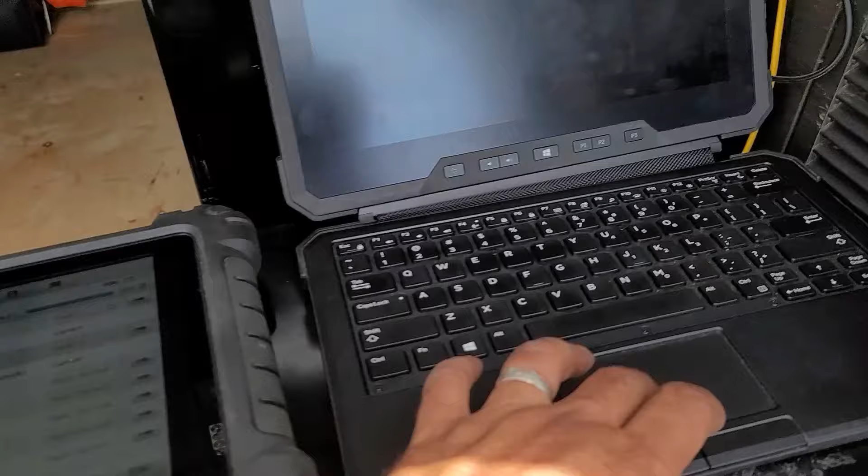I'm working on a 2015 Nissan Altima 4-cylinder, customer complaint check engine light. I scanned the vehicle, and in the engine control module we have one code, which is P0101 mass airflow sensor circuit bank 1. Usually I don't look at the computer mass airflow. I went to the engine control module and I looked at it. It's an easy design, 4 wires.

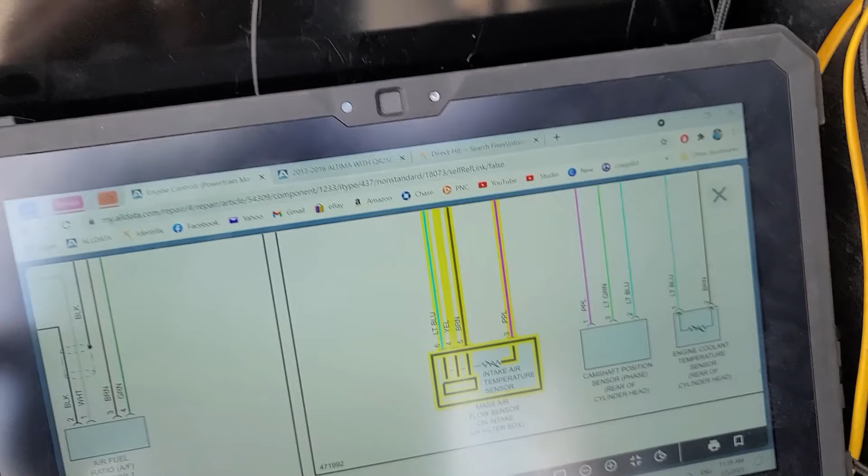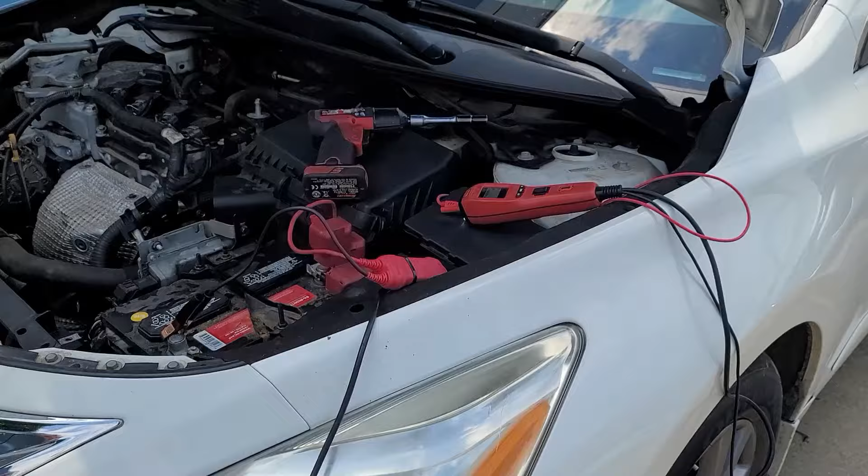This component has 2 sensors inside, the intake air temperature sensor and the mass airflow sensor. There's 4 wires, power, ground, and 2 signals sent back to the computer. This yellow one is for the mass airflow sensor, and this purple one is for the intake air temperature sensor. If you guys are at home and need to do this, it's easy.

All you need is a $20 DVOM like this one, not like this one. This is expensive, but you need a $20. You understand my point? And you just put it on voltage. You start the vehicle. There we go. We have the check engine light on. And after you start the vehicle, you come.

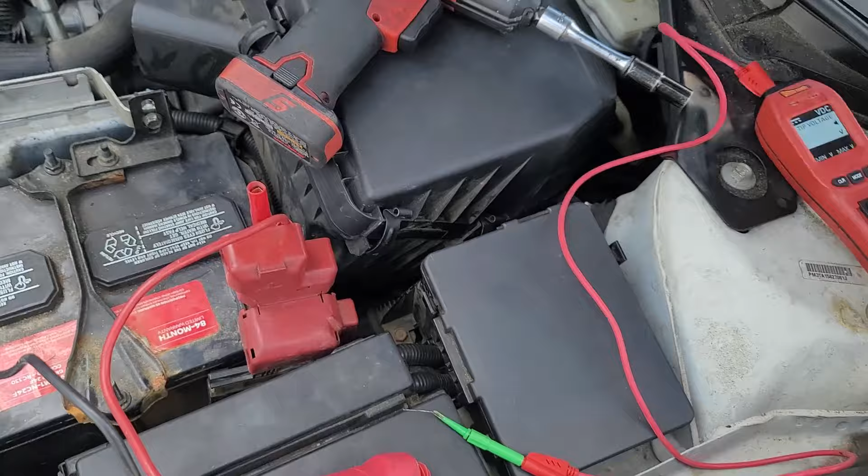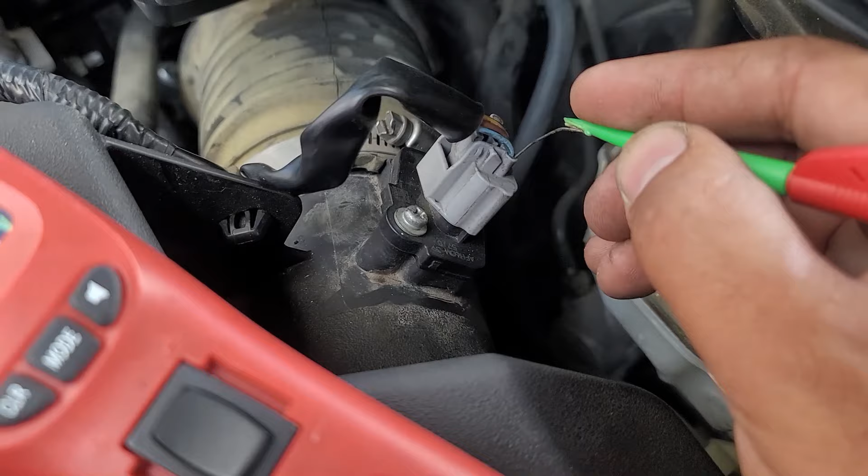Don't be intimidated with this one. This is a power probe, which is the same as the voltmeter. I just use it because I'm filming constantly, so I need a one-hand operating device, which is this one. So we are going to check 5 volts in this blue line right here, and we do have 5 volts. Next to it is the brown one, should be ground, and this is ground. So power and ground to feed the 2 sensors inside.

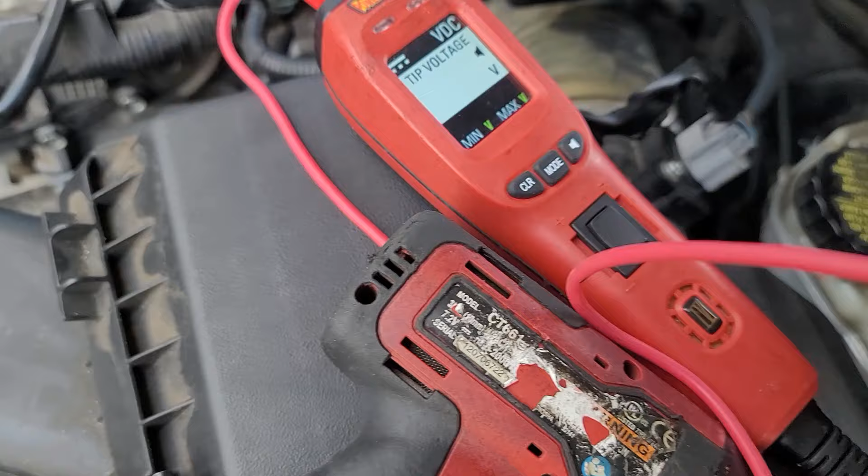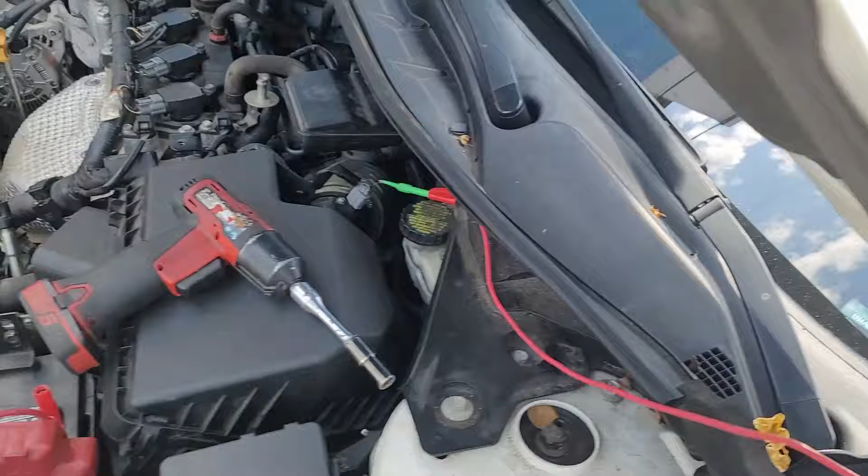The yellow one is the signal for the mass airflow sensor, and you see we have a reading, and a good indicator that your sensor is working is by letting some air go in. Watch the reading right here. There you go.

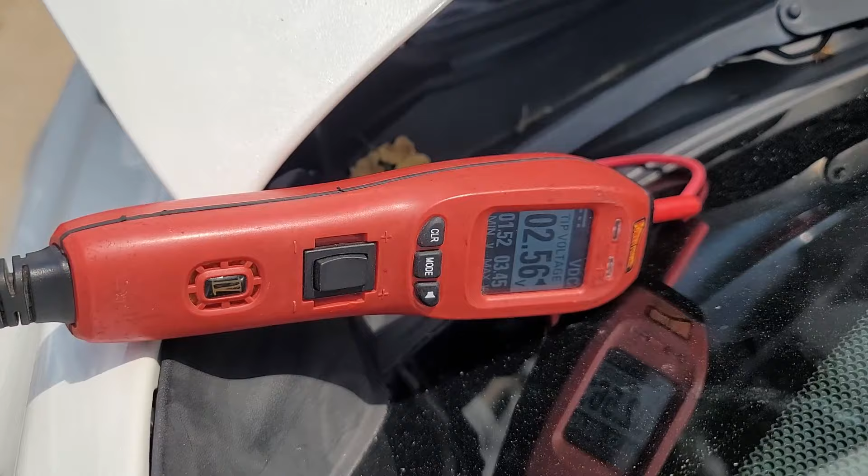Now, just in case you are here to check the intake air temperature sensor, right here, the purple one, and we do have 2.56 volts of reading. This one you cannot rev the car to have a different reading, because this one depends on the temperature, not the volume of the mass of the air coming into the engine.

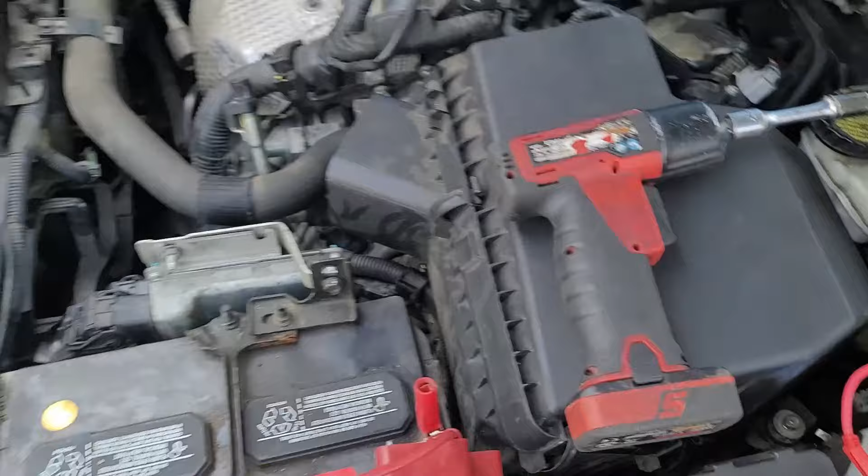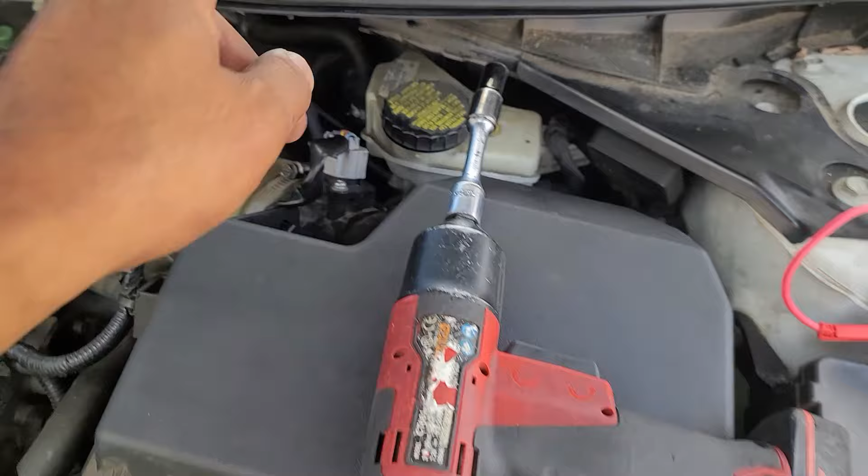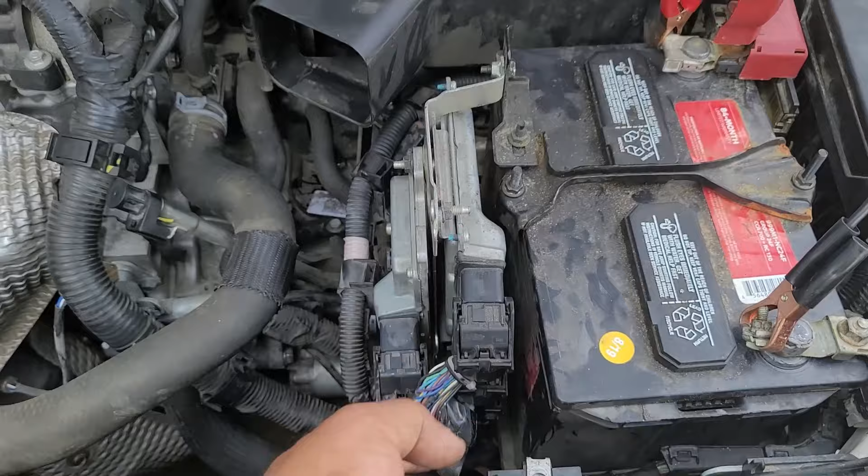Now, after you check this, technically you have to go to the engine control module. You locate the harness that has the yellow wire if you are dealing with the mass airflow sensor, and if you're dealing with the intake air temperature sensor, the purple wire. You have to locate them here and see if that signal, that voltage that we checked over there, is the same here. If it's not, that means you have a cut in the wire. If it is, that means you have a bad computer. You have to replace your computer and program it. Now, this is all normal.

The reason why I brought you guys with me is because there is a TSB. A TSB is a technical service bulletin. It is like a recall, but it's not a recall. It is a PDF released by the dealer, because there are many similar cases reported by owners of similar vehicles. So the dealers release TSBs to help mechanics and people fix their car or identify the problem quicker.

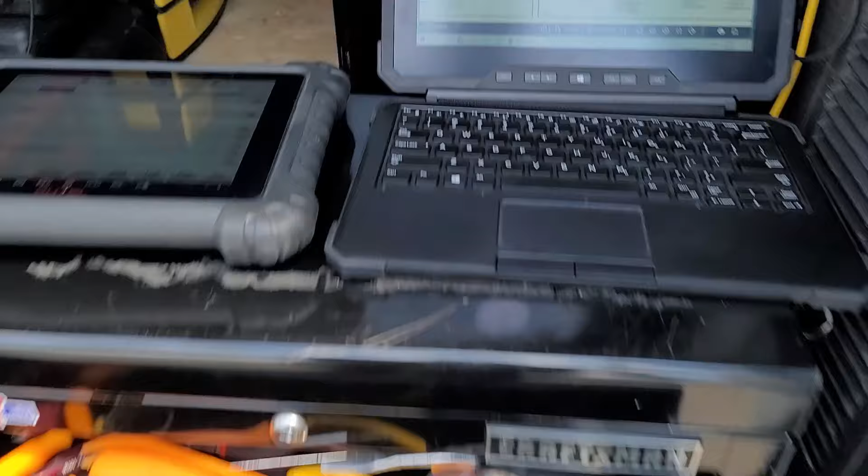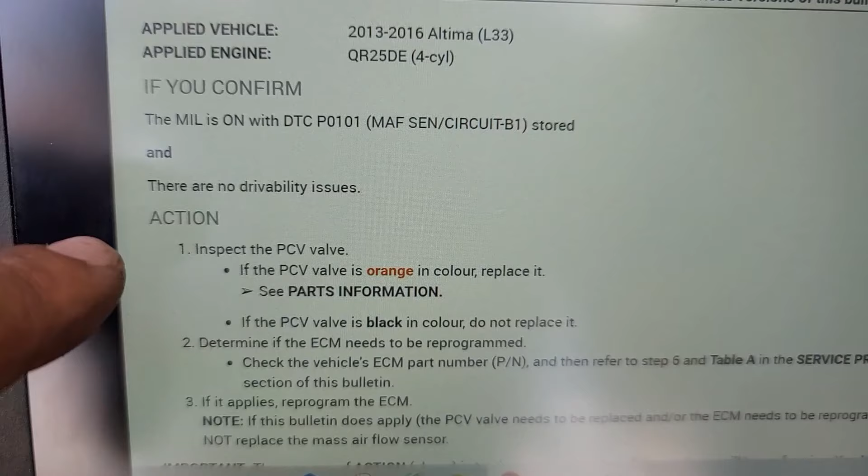The TSB is about that code, P0101, and the TSB states that, this is the TSB 2013 to 2016 Altima 4-cylinder P0101. So the TSB states if you have that check engine and that code, inspect the PCV valve. If it is orange, then replace it. If it is black, do not replace it.

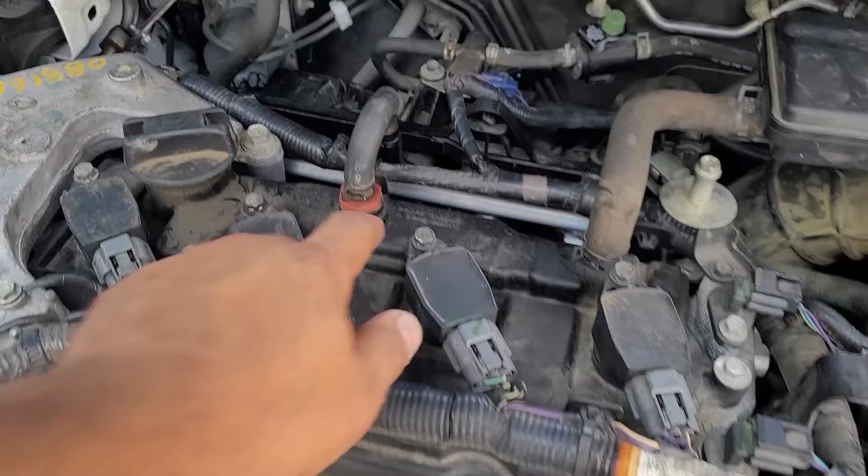And then you have to check your engine control module, the computer, to see if it is within some numbers that they released. If it is, then you have to program it. The PCV valve is this one. Ours is orange, so according to the TSB, we have to replace that one. Now I have two ways to go.

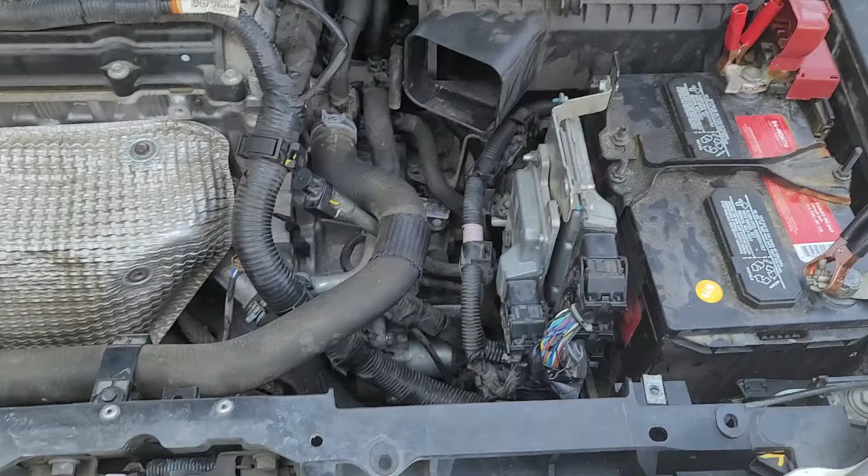Finish my check-in, make sure, because after all, it could be a real code. It could be that really we have a cut in the wire, in that yellow wire between the computer and the sensor itself. Probably we don't have any problem with the PCV valve. So that's when I actually stopped and figured to bring you guys along with me.

I removed this stuff, 10mm bolts and some clips to remove these plastic pieces, and we're going to get to those 3 wires here and check our voltages and see if we have the same values that we had over there. And if we do, if we didn't have the TSB, that means the computer is bad. But before changing the computer, we have to replace the PCV valve and reprogram the computer. So stay tuned.

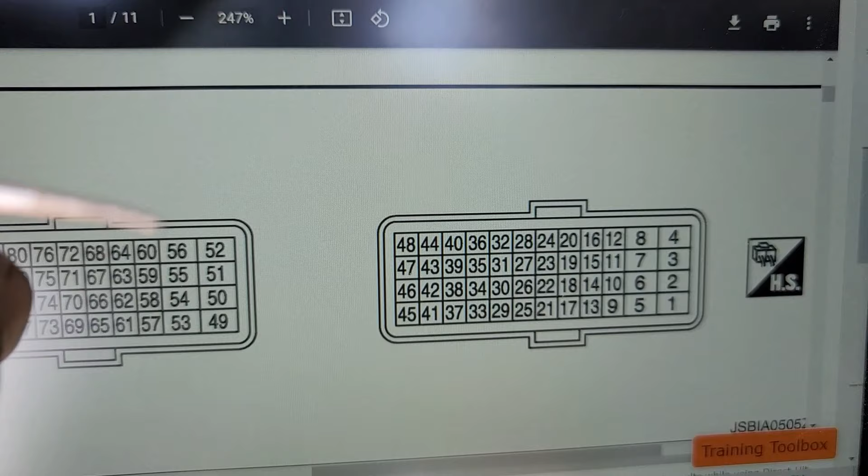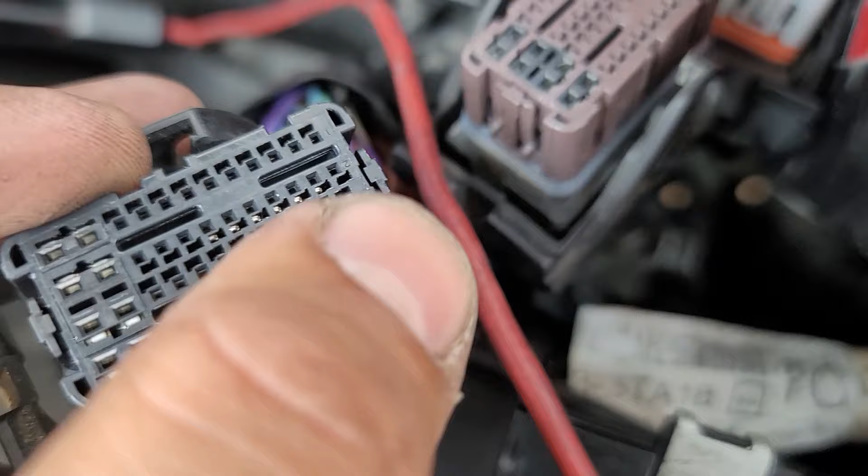This is the layout for the harness. We are working on 34, 35, 36, especially 35, the yellow one. That's our signal wire. This is the back of it. So this is the harness, the first one right here. This is the one. And don't be fooled by some numbers here, 1 2 3 4. This is wrong. These are 1 2 3 4 5 6 7 8. I will flip it and I'll show you guys.

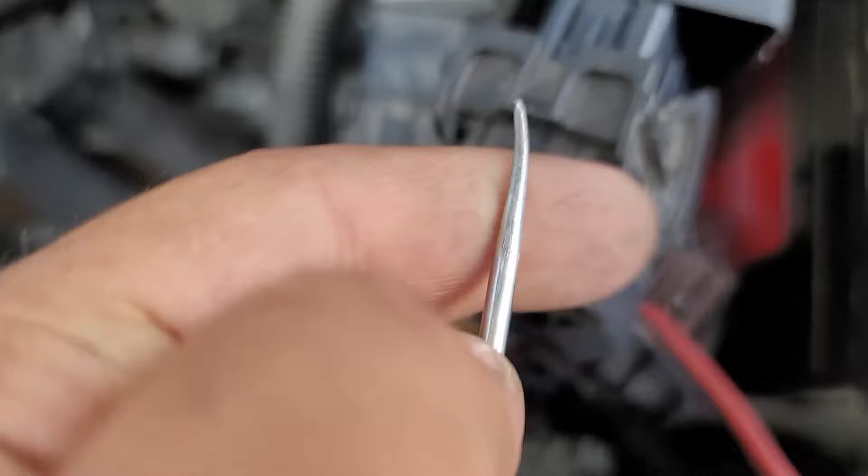And I need to move this cover out, and the way to take it out, if you're trying to do this at home, you see this side piece, you bring something and you push it away like this. Okay, probably on this one better. You see how it is? You shove something here and you push it away from both sides, and then you pull this one out.

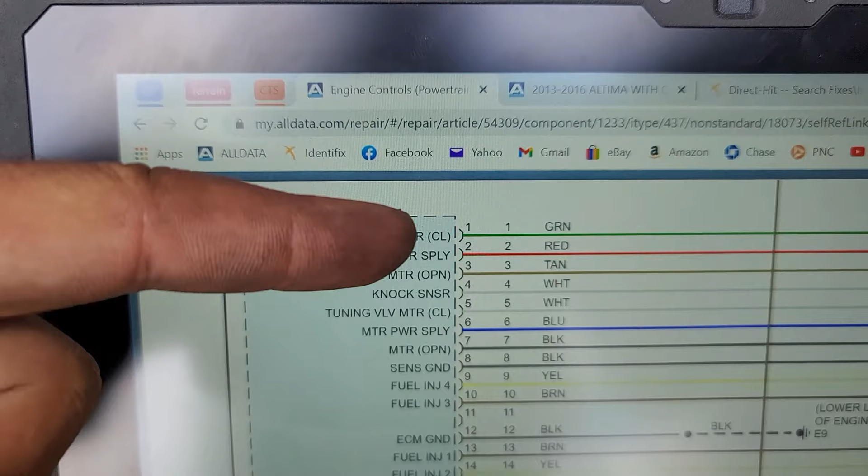This is the harness, and it should be green, red, tan, white. Green, red, tan, white. 1 2 3 4, and they go like this. 1 2 3 4 5 6 7 8, blah blah blah. I will locate the wires and I'll show you. There's 2 ways to test this.

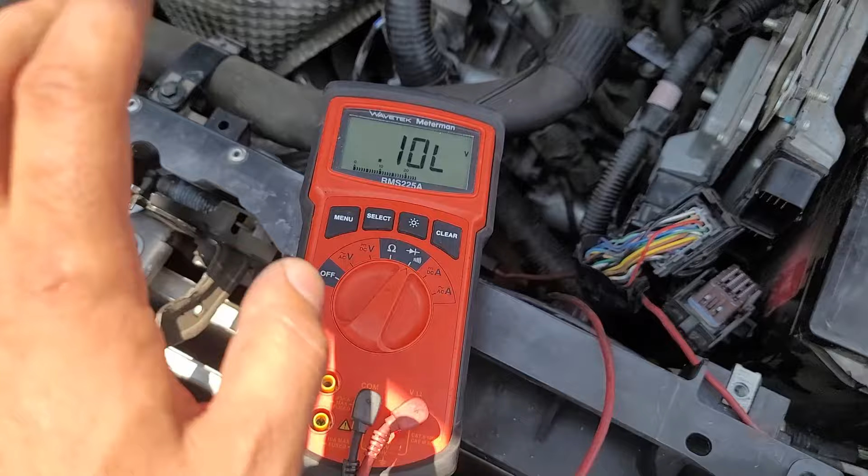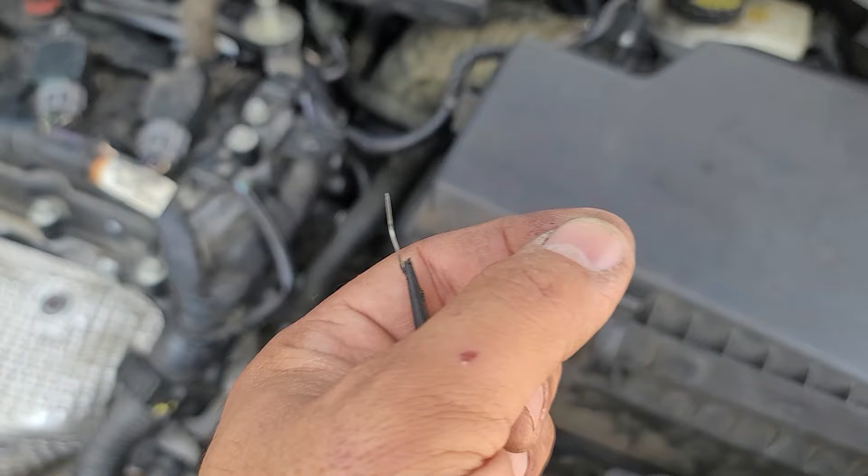First, disconnecting both harnesses and doing continuity, either ohm resistance or with a beep if you have it in your DVOM or ohm meter. And I know the ones for $20 from the auto store don't come with this kind of lead. So what you can use is a paper clip, make it a T-shape and then use it. Be careful if you're going to touch here, do not shove it all the way in, because you're gonna spread the terminal inside, and that's gonna create another problem for you.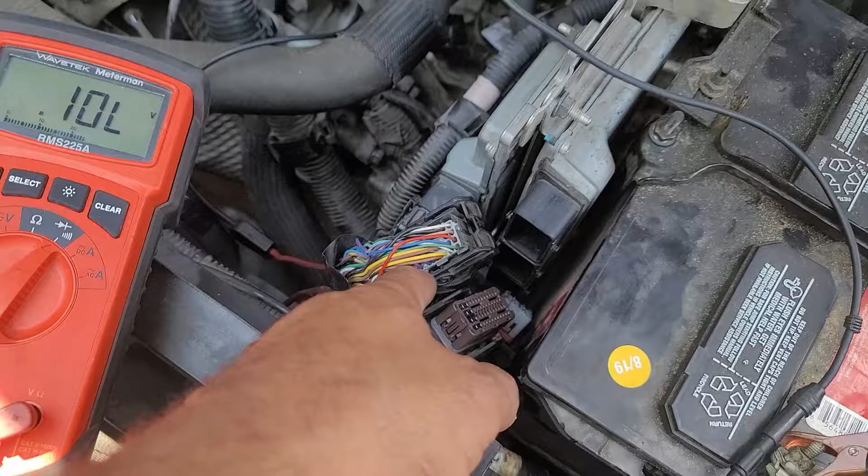But let me locate the pins here, and then we'll do a continuity test to make sure that the wires don't have any cut. And also we will do a loaded circuit test when the car is running. All right, so if you count 1 2 3 4, the 4th row this way, and blue, yellow, brown, purple over there. Blue, yellow, brown, purple. I am on the yellow one, the signal for the mass airflow sensor, and as you guys see, I have continuity. That beep means I have continuity.

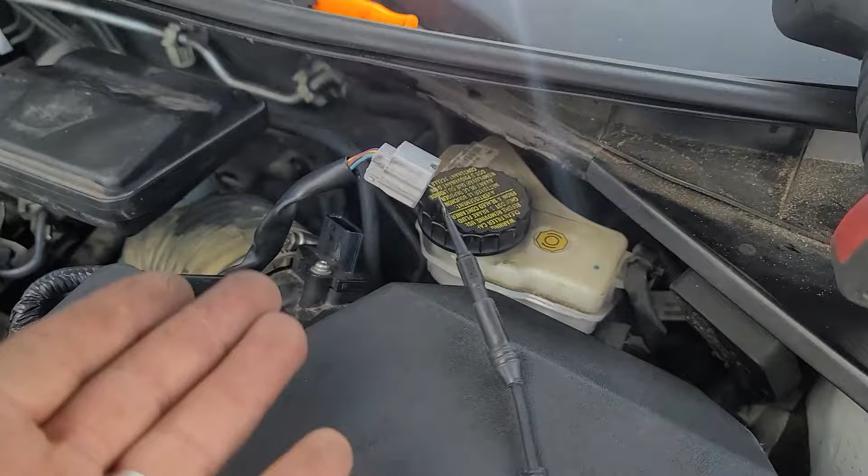All right, it's not that it matters, but it makes no sense if I check the blue and the brown, because both of them get it from the computer. So that's a feed from the computer. So if I have it over there, that means the wire is good. But just to prove my point, this is the blue, and here's the blue.

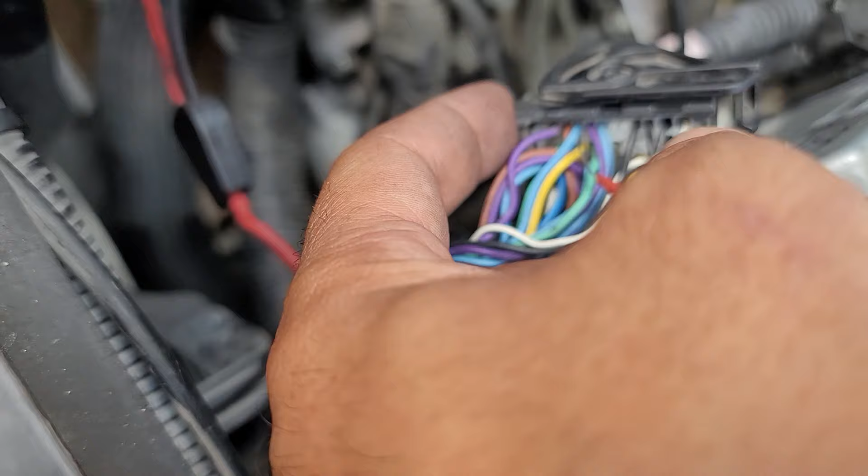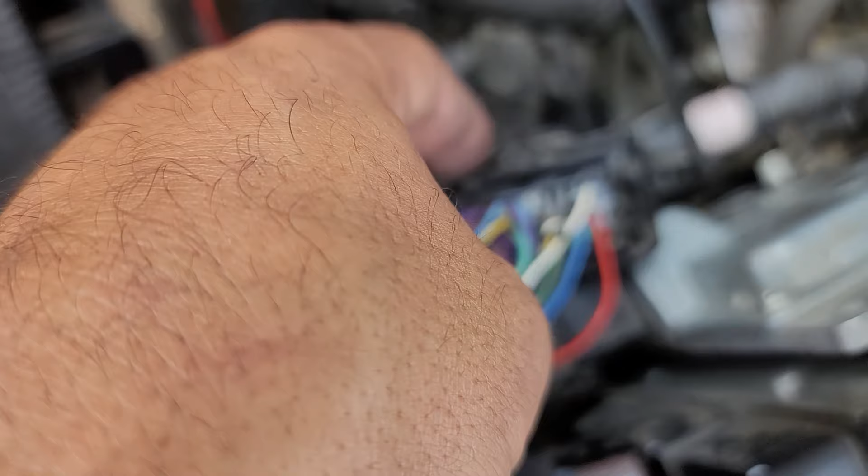All right, and I'm not gonna check the brown, I'm gonna check the purple, which is related to the intake air temperature, just in case you guys are here to check the intake air temperature. This is how you check your signal wire. But again, this is using continuity. We're gonna use voltage soon. Here's the purple one, and I have to switch to the purple one, which is the fourth one right here.

One hand. 1, 2, 3, 4. All right, you see the beep. So all the wires so far are good. Now we're going to do a loaded circuit test. All right, so for the loaded test, we are back on voltage, and we measured 1 point something

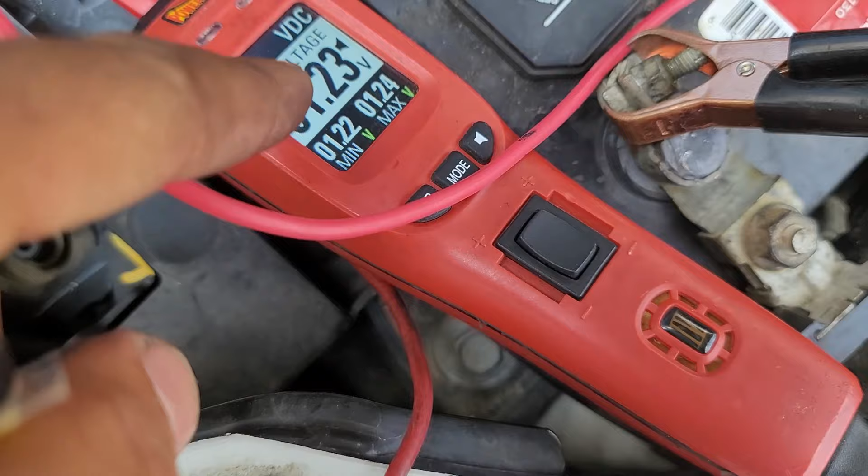here, and with the key on, we should have the same measurement here, and we do. I'll show you guys. See, I'm gonna put it right here. See, we have the same measurements, and actually these are the values if you guys are interested.

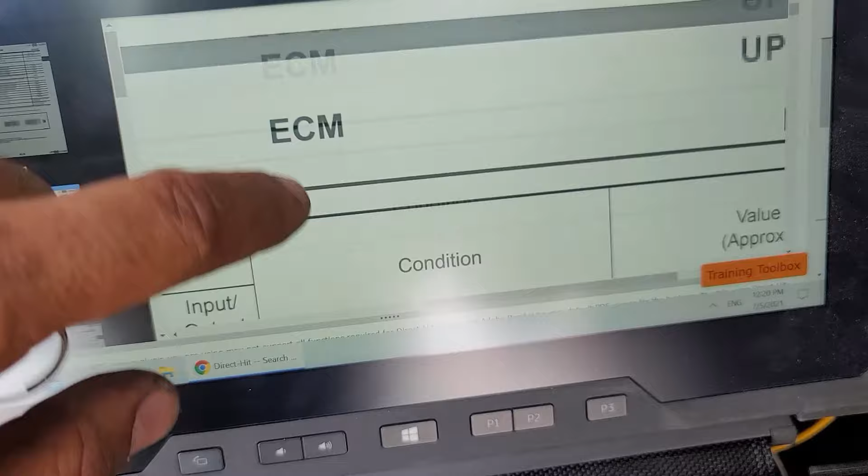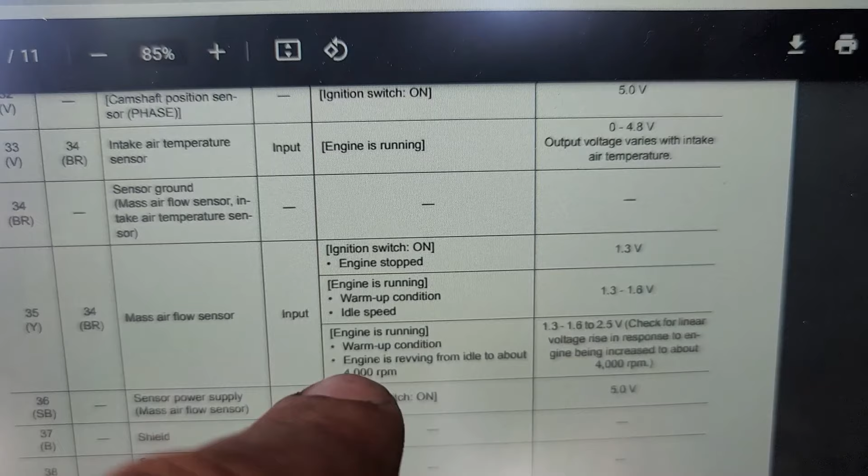Pin 35 right here. On ignition on 1.3, engine running 1.3 to 1.6 idling, and then when you rev it, it should get between 1.3, 1.6 to 2.5, which happened with us. So far everything is good to here.

So if we didn't have that TSB applied to our vehicle, we should change the computer. That's exactly why I bring you guys here, because do not change the computer. That's a lot of money to spend. Change that PCV, and I will look for that list of VIN numbers, vehicles, so you guys have an idea, and check with your VIN number to see if your vehicle needs computer reprogramming after you change the PCV valve.

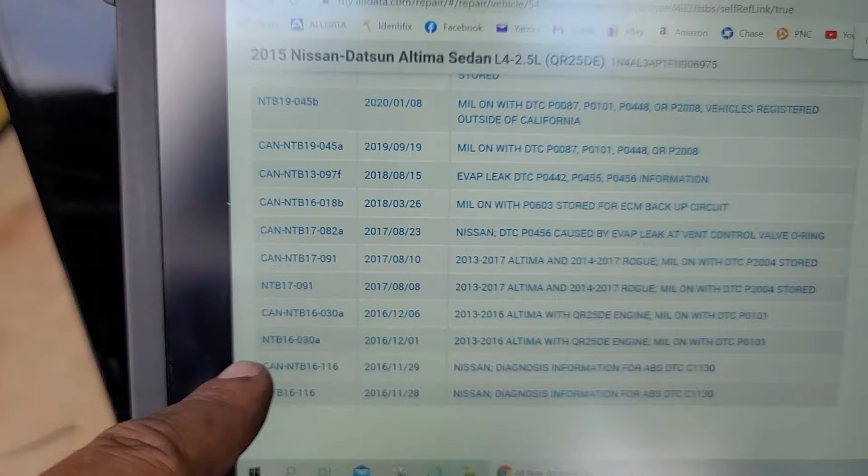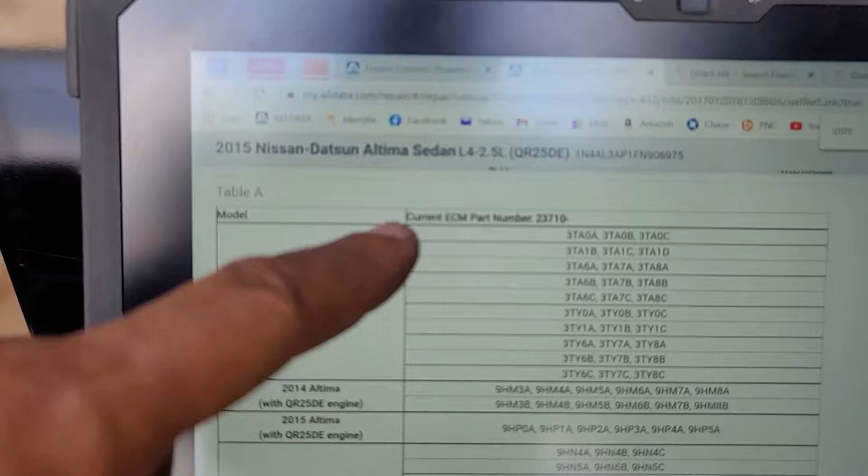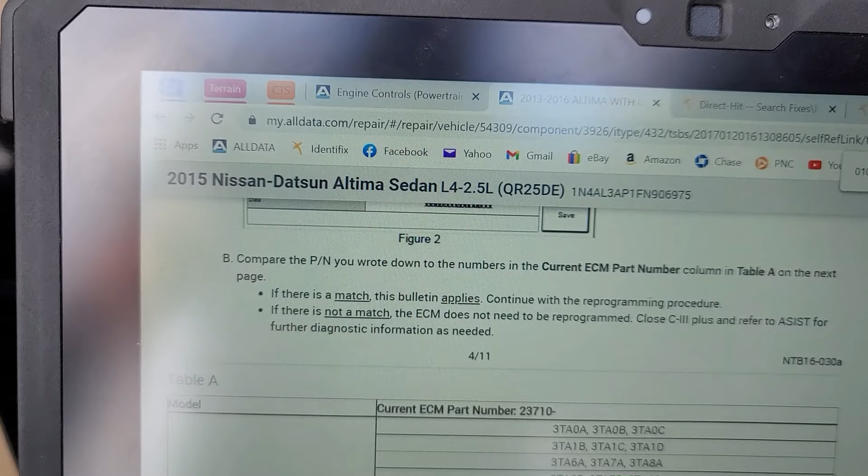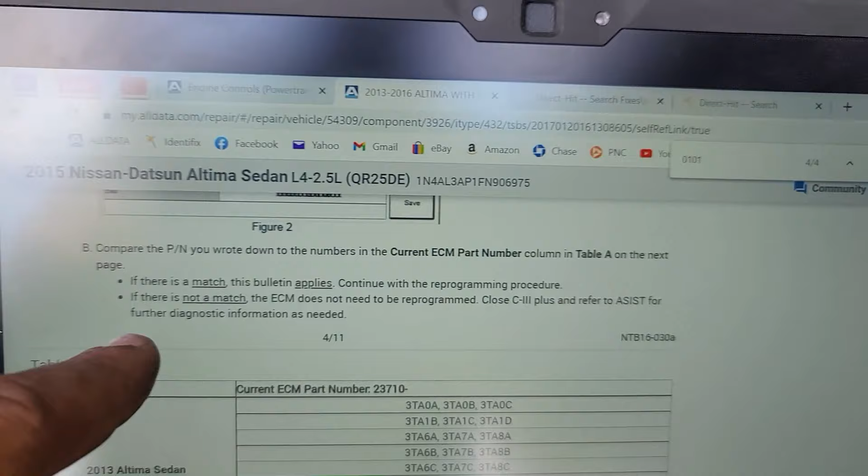There's 2 releases for that TSB, so we're going to go with the most recent one, this right here, and the list, and I said VIN number, actually it's not VIN numbers, it's the current ECM part numbers. It starts with this one, and then this is the rest of it. So if there is a match, this bulletin applies, continue with the reprogramming procedure. If there is no match, the ECM does not need to be reprogrammed. Close whatever software they're using, and so you guys can pause.

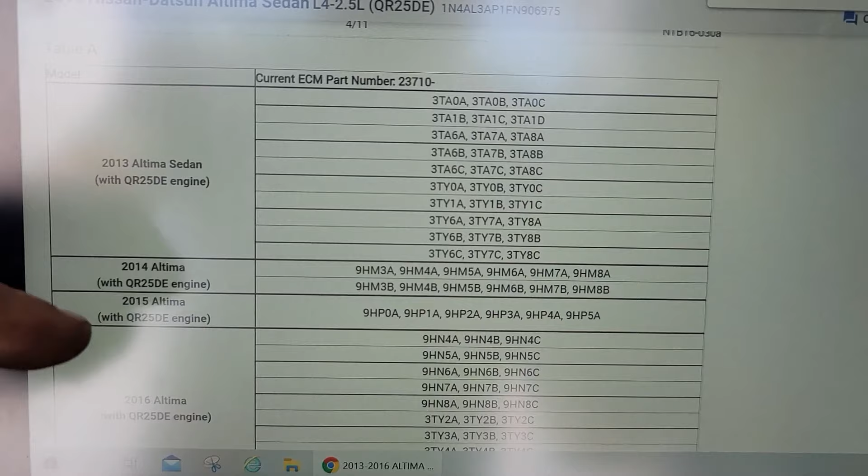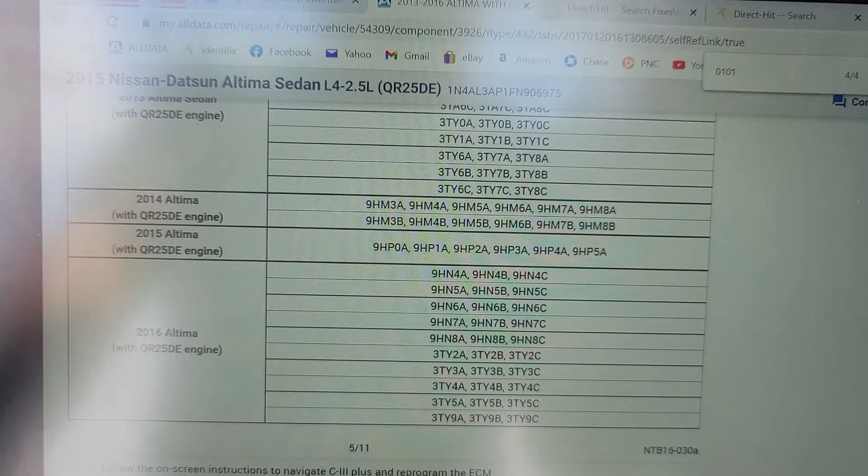Starts from 2013, 14, 15, 16. These are the part numbers for the engine control module. We have a 15, so we have the least options here. Let me look it up and see if this vehicle applies for reprogram. I think our computer does not apply to reprogramming. We will change the PCV valve, and I will wait until we finish with this job.

I will try to bring you guys back to this case, because I know here they change the part and they sell the car right away, so I'll do my best. If not,

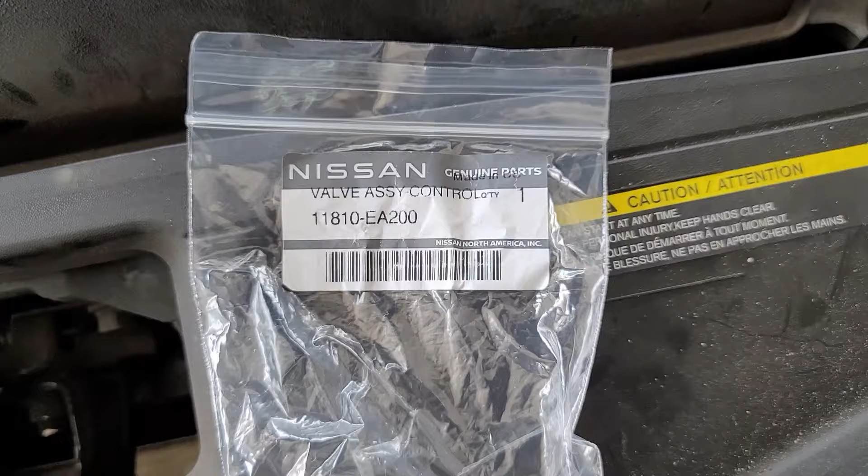As of programming, I'm not 100% sure if we qualify for reprogramming or not. Based on the list that I have in my computer, we are not, but I don't know if there is an updated list for that. I have to look into that, or probably give this test to the owner himself. But as of programming, they said it will cost $150, I think. So we have the part here. This is the part number right here, and we're going to replace it.

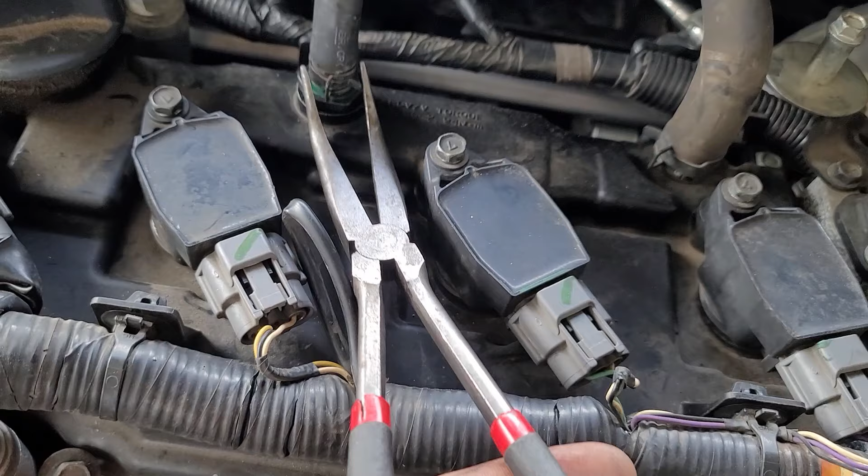The part has been replaced. It's really easy. All you have to do is use pliers or something to open these and push them out, and this will come out with your hand easily. And then I think this is a 23, but I don't have a 23, I have a 24, and it was easy to take out. Once you break it loose, you can do it with your hand.

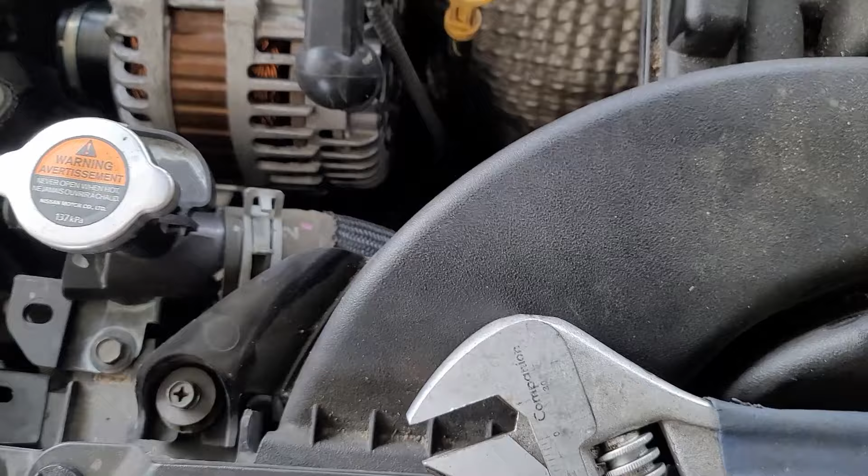When you replace the part, be careful, super careful. This is plastic on plastic. When you tighten it, be really careful. You don't want to overtighten it and then you drop a screw down there. Okay, I see. I have to take it out. Yeah, be careful.

Do not over tighten it. Otherwise you either crack it or crack the valve cover. So we're going to bring the scanner, delete the code, and see if that's going to fix the issue.

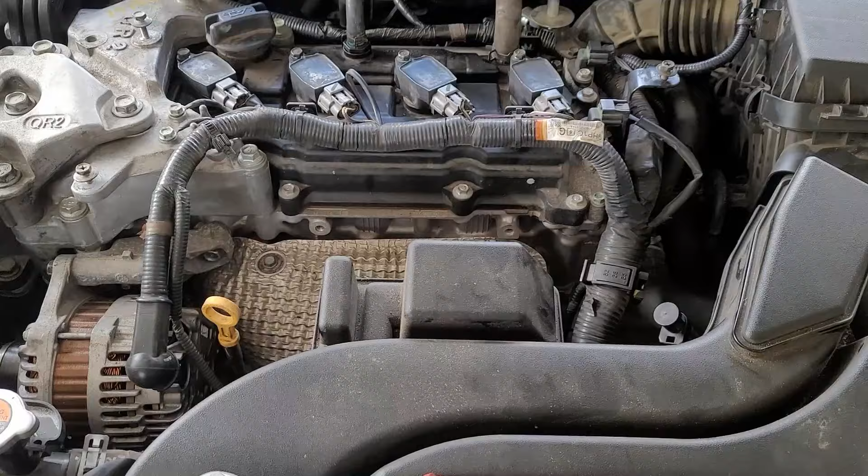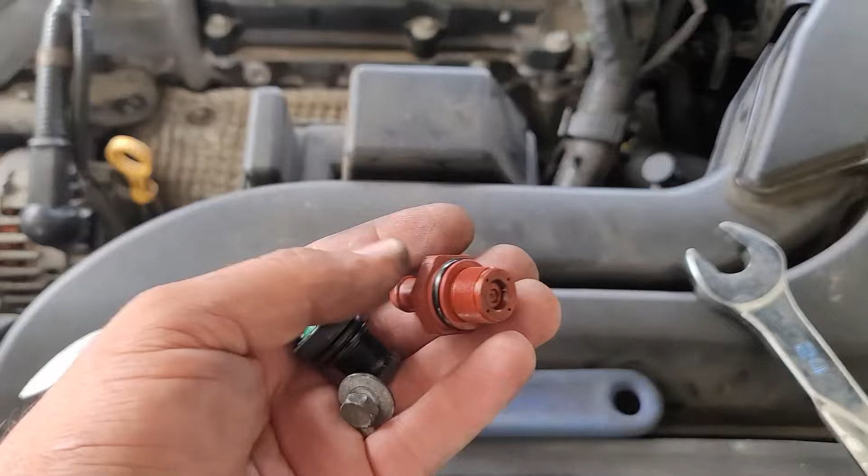And the bolt is out, just in case. Some of you guys might be surprised, why did I take it out? I took it out for two reasons. First, I wanted to do a comparison between the two in operation and see if this part is really defective. And second, I wanted to show you guys when I tighten it what the deal is, how to do it. So the first one,

I mean I have a kit, but I'm gonna use this. This is a valve, so it prevents air from going this way. So, you guys hear it? Air going that way, not a problem, but this way it shouldn't be. All right, let's check the new one. It's tight. It doesn't have anything.

Good, how are you, man?

Again, it is tight. It doesn't have anything. All right, so second, I'm gonna install it. Use your hand.

What's up, brother? How are you?

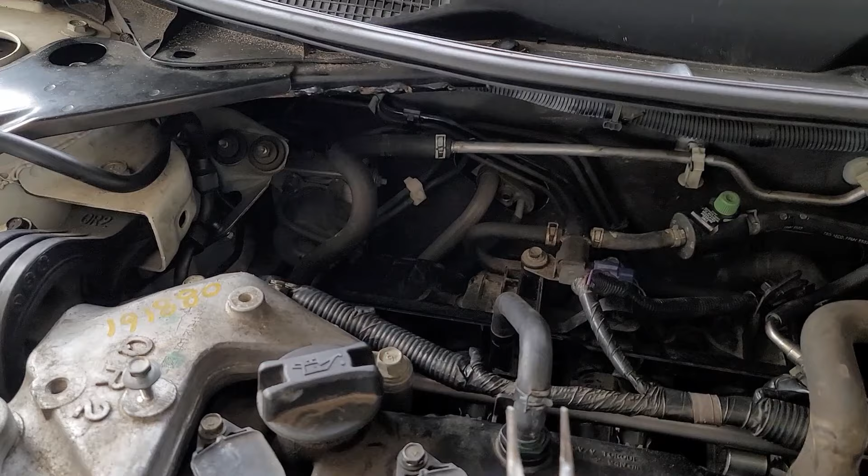With your hand, as tight as possible, and to be honest, it should be okay with your hand. Now it's stopped with my hand, so with the wrench, a quarter of a turn and another one, boom, that's it, like half a turn in total. I'm feeling good about this just because of the results of what we just did. So let's go ahead and do the scanner part.

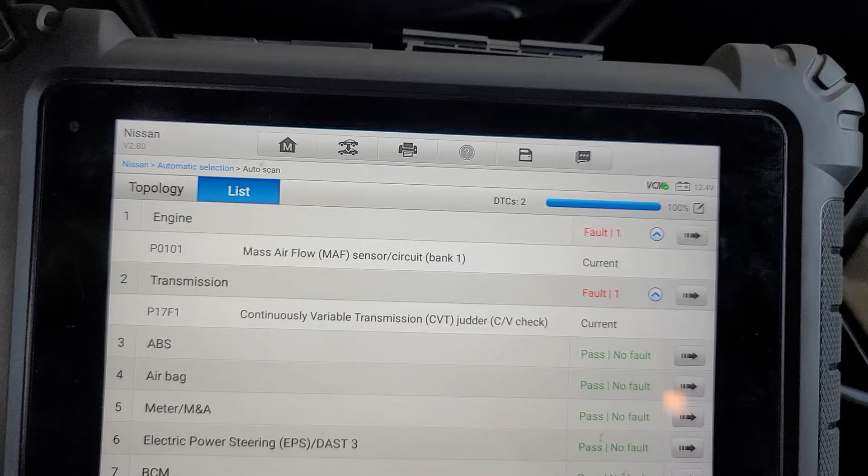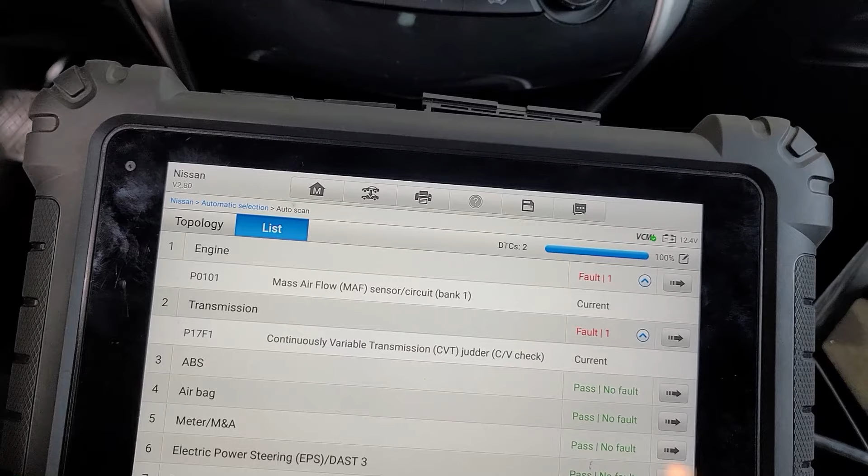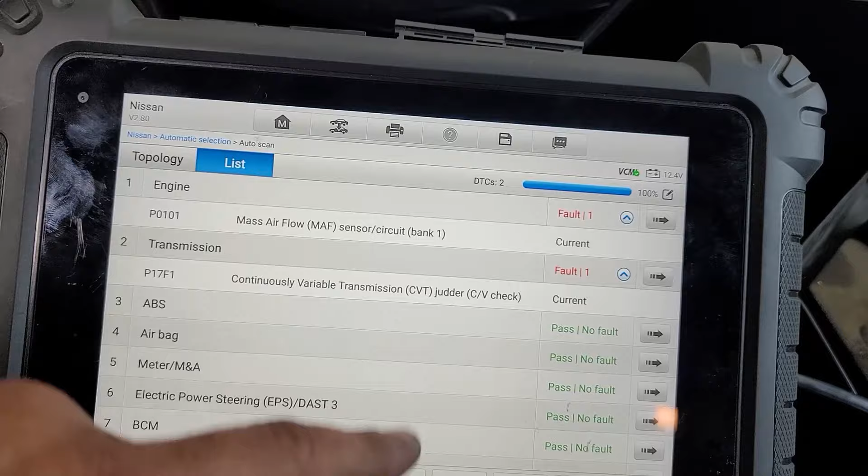We're inside the car. I have the key on. I just did a full scan. We still have a current code because I haven't started it yet. Technically, I think you need to drive the vehicle for, I don't know what the routine is to make this a pass code, or we could delete it and see if it comes back. By the way, the owner needs to look at this code in the transmission. This might be a serious code, but let's do a quick erase.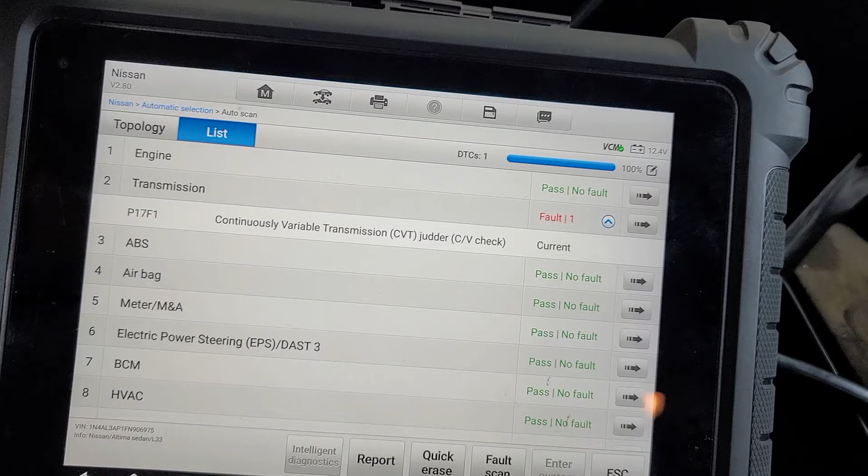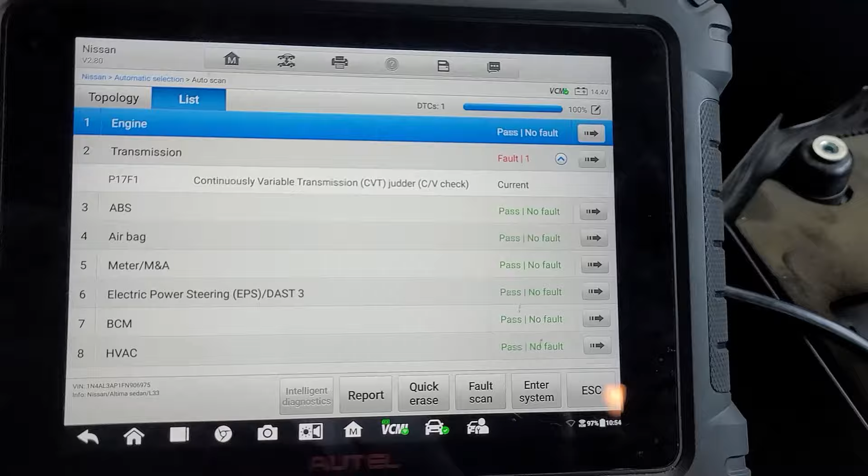Alright, this is current, this is hard code. Check engine light is gone. Let me go to the engine control module. Let it run, idle for a little bit to about normal temperature. I want to check the fuel trims, and I should have checked them before changing the part, to see if there is any change. But I mean, we did the test. We saw what a difference that makes. It definitely was leaking.

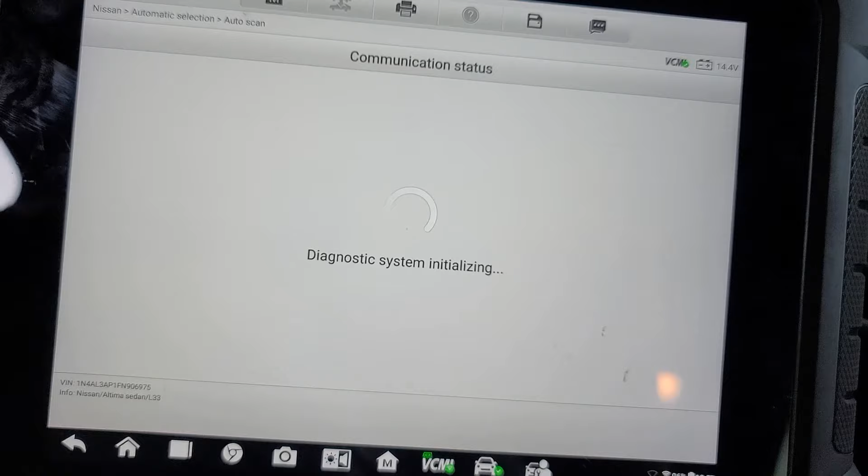All right, I'll bring you guys back. All right, I'm definitely sure it's in closed loop right now, but I revved it a couple of times. It hesitated in the beginning, but then it cleared. I don't know why. Let's do a full scan. Engine control module. Trouble codes. Okay, no codes.

I'm gonna call this a fix right now, give the car to the owner, let him drive it for 2-3 days, see if the check engine light comes back, and if it does, for what reason. But hopefully that P0101 is fixed for now.